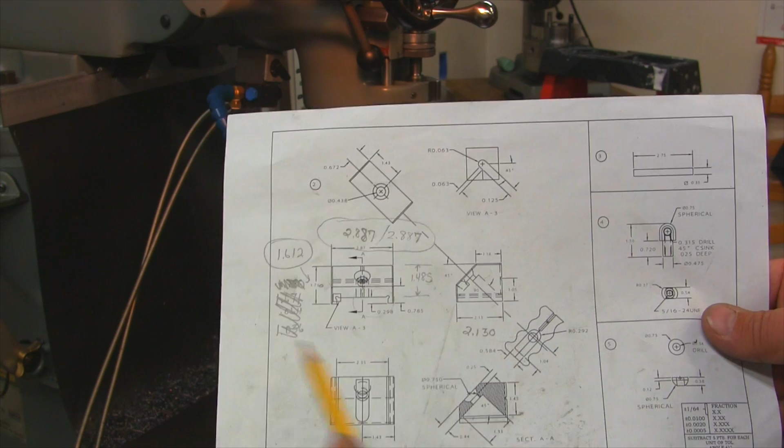To start truing up the sides here. We'll pull it out and we will file the edges. Now the next surface that we're going to do is we're going to size this in for width. So the plans are showing finished width here, and we got 2 inches, 877. I spoke to Adam and obviously he's leaving around 5 thousandths or so each side. That's really the model we're operating off of, about 5 thousandths each side for Stan to grind them. So Adam is at 2 inches, 887. So that's what we're going to finish ours to, 2887.

That's a nice finish. 30 thousandths cut, about 660 RPM. I like that. This cut right here is 30 thousandths. After that we have a 28 thousandths finishing cut that we're going to do. I'm going to mic it before that just to make double sure, but

we had 58 thousandths to go, and I'm just dividing it in half. With a cutter like this, you need to put a little bit of load on it. You can't take off a thousandth or two. It's not going to get very accurate with that. Carbide needs to load up a little bit. All right, we're at 2 inches, 914 thousandths. I'm going to slow the feed rate down just a little bit too.

That's going to be one hell of a burr to try to file off. Two inches, 887. So now what I'm doing is I'm just cleaning this first reference side, and it's pretty much a finishing cut. Then we'll flip it. We'll take another clearing cut, we'll measure it, and then we'll bring it down into spec. Okay, 2 inch, 187. To our 140, that is 47 thousandths.

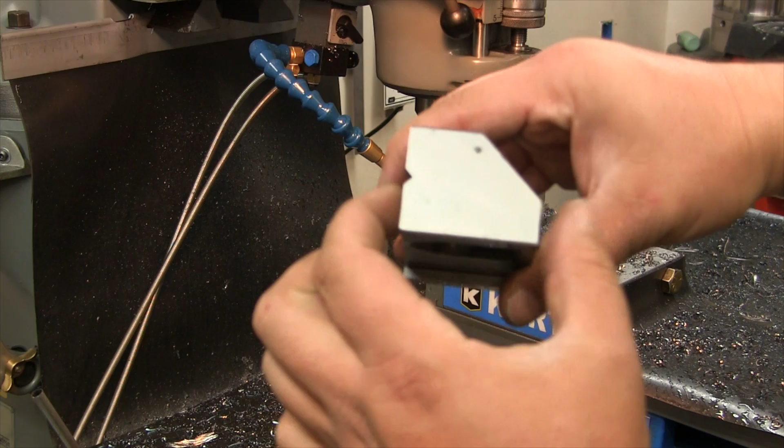Thousandth big. You know what I'm gonna do? I'm gonna leave it. It's a thousandth big. I just made more work for Stan, so I'm gonna keep that. I'll keep a nice finish, and it's a thousandth big. And really, what that is, is just the length, the fatness of the jaw that rides this way. In fact, I'll show you. That's really this length right here. So it's not a critical measurement at all.

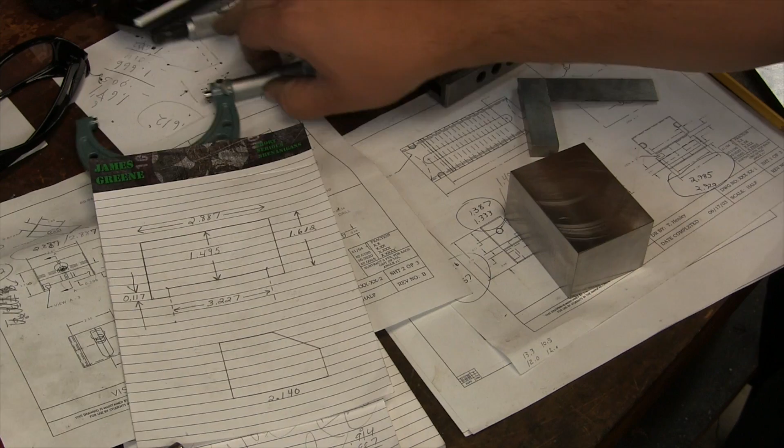Now the next operation that we're going to do is we're going to mill this little slot in, and that slot is going to be where this movable jaw rests and slides on the bed wings, right? Just like here. So using our little model here of an existing vise, we're going to mill this slot right here. Okay? So it slides on.

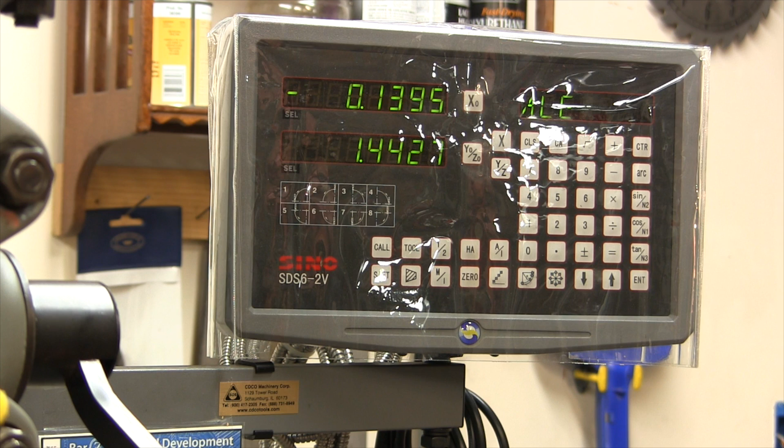Alright, this little wiggler ball is a 1/4 inch. So we need to move in 125 to be on dead center. So my piece's actual width this way is 2 inches 886. So half of that is 1 inch 443. So that's what we need to move. 1 inch 29. We need 443. One-tenth, we're not going to sweat that. 1 inch 443. That is now our center point.

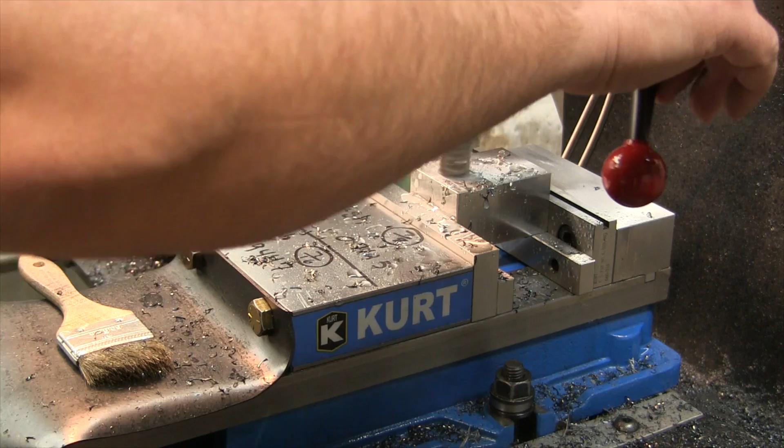Loosen my table. I'm going to come back, do the other part, and then I'll just mill out the center slot. The center, what's left. Alright.

We got our 7/16 2-flute end mill in, and we just took a clean pass across the edge, and I'm just cleaning things up here. Just moving through, just working it by hand, that's all. Just removing all those roughing marks. I'm going to mic it, and then we're going to see how far we got to go down. We need to go down to 117.

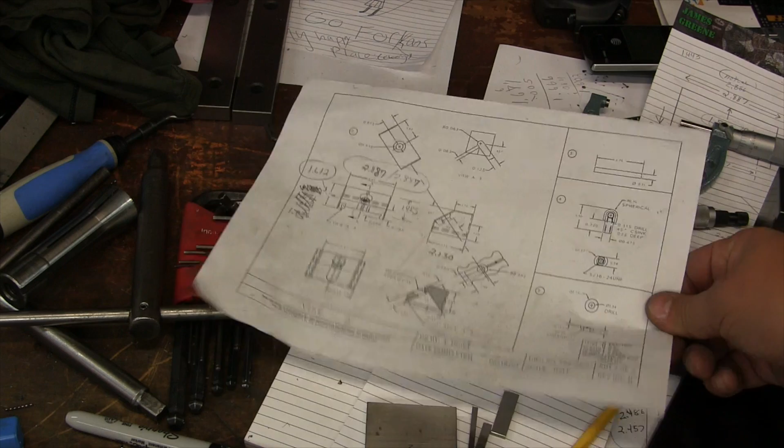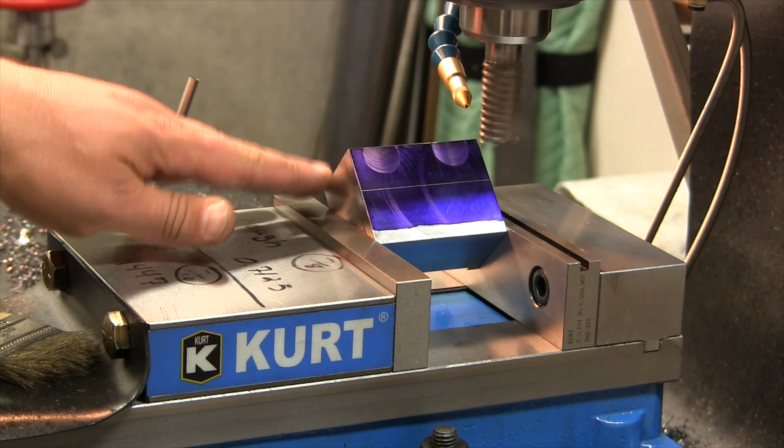Now the next operation that we're going to set up for is milling this 45 slant. It's going to need to come to 1 inch 180 thousandths, but because we need to allow for the 5 thousandths, and it's on a 45, I'm going to make it 1 inch 182.5 thousandths away. Alright, we got our piece mounted up in the 45 and we're ready to take our cut. Let's fire up the cool mist.

Now I switched over to a 2-flute 3/4. I actually found a 3/4 2-flute, and we're putting our finishing cut on it right now.

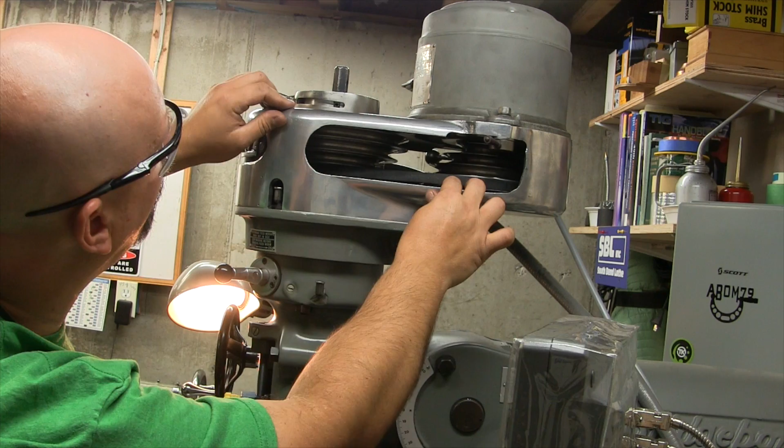We've loaded up our chamfering tool, and the secret formula here, after talking to Adam, was 60 thousandths down after touching off. So I'm going to lock my spindle. We've touched off, got this at high RPMs, very high RPMs, and we're going to feed up 60 thousandths on the knee. Boy, that really makes it look nice.

Okay. Yeah, that looks marvelous. Take these little burrs off that came from the milling of the 45. I'm just taking a carborundum stone and, ooh, this definitely has a burr on it. I'm careful not to hit the face. There, that's good. Just touching, locking my spindle. Move off of here. And now we're going to feed up 60 thousandths.